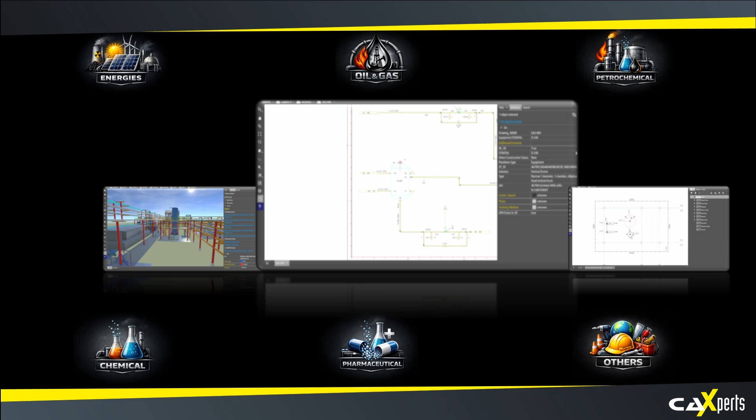UniversalPlantViewer, UPV, by CAXperts had grown into a default viewer for many customers around the world and across industries, from energies, oil and gas and petrochemical, to chemical, pharmaceutical, and many more. Over time, it evolved from a simple model viewer into a comprehensive visualization and engineering support platform. From 3D models and P&IDs to measurement, reporting, laser scans, and scan overlays, UPV redefined how engineers explore and understand digital assets.

Now, UDiTH takes that strong foundation and builds an entire ecosystem on top of it and around it. This ecosystem moves beyond pure viewing. UDiTH consists of multiple aspects: the UDiTH platform, the UDiTH apps, the UDiTH Portal, and the Universal API and integrations.

The UDiTH platform delivers all that is needed to build your digital twin your way. UDiTH comes with several ready-made apps and an ecosystem that allows you to create apps and integrations. The only limit is your imagination.

The UDiTH Portal is your central hub for local and browser-based model distribution, access, and administrative overview.

The Universal API is the driver behind customization, apps, and advanced integrations to master any challenge, current or future. UDiTH, modular by design, open by philosophy.